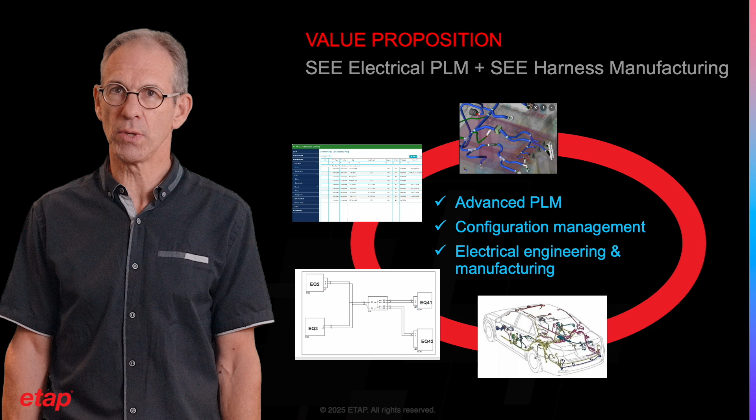A vehicle's reliability, safety, eco-efficiency, enhanced comfort, and more services have led to increased requirements for electrical cabling design, manufacturing, and traceability, as well as for the configuration and variant management. SEE Electrical PLM and harness manufacturing is a cutting-edge web-based software suite that is redefining what it means to be efficient in the management of electrical design data throughout the product lifecycle.

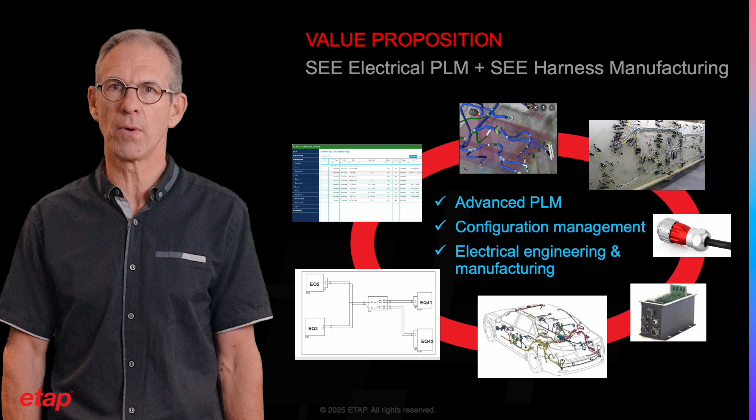By integrating advanced product lifecycle management functionalities and configuration management with robust electrical engineering and manufacturing tools, ETAP improves collaboration and ensures regulatory compliance. Based on 22 years of experience with top companies in their industries, our latest version 5 of our software suite, SEE Electrical PLM, is a culmination of the dedication to continuous innovation by our R&D team to introduce new features, enhance existing functionalities, and adapt solutions to the evolving needs of our diverse customer base.

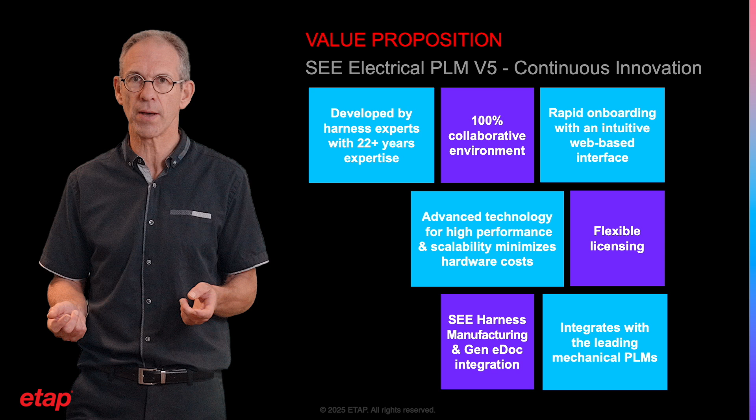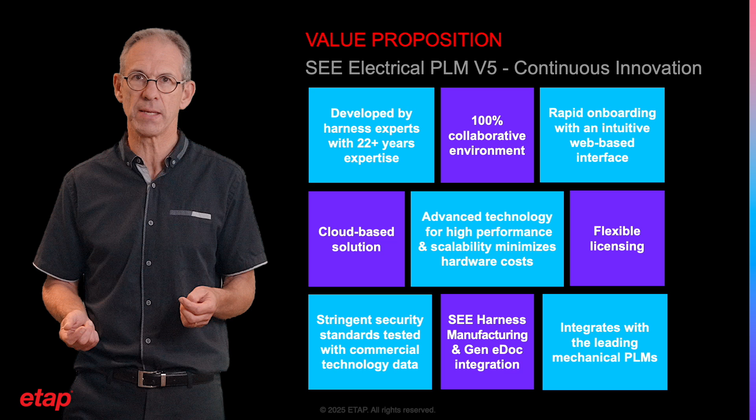The V5 integrates many lessons learned on how to simplify the collaborative design process and provide a more user-friendly interface. But there is more. It also benefits from the best performance, security standard, and scalability available by the latest cloud-based technology. Let us illustrate first together the challenges faced by electrical engineers when they tackle harness design complexity.

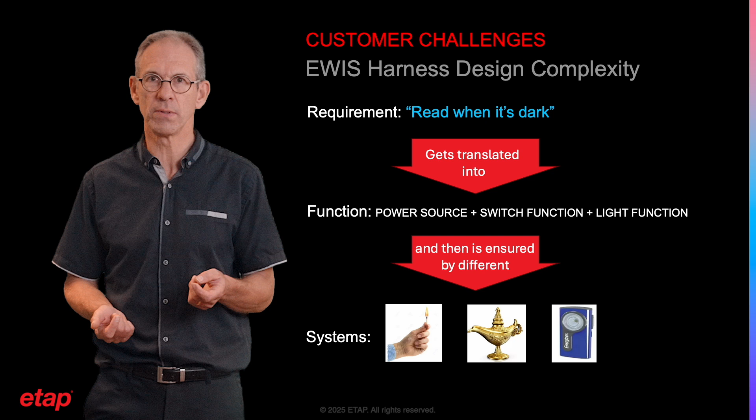Imagine, for instance, a high-level requirement received from a customer, such as read when it's dark, and how we transform this requirement into the final EWIS deliverable. The system engineers analyze the requirement and translate it into the relevant functions, which would be in this case power source plus switch function plus light function. To fulfill the light function, we may use different equipment devices like matches, a pocket lamp, or even Aladdin's lamp, the all-in-one option for very demanding customers.

We then have to define how they are linked to each other, which is done by many wiring diagrams representing the system logical definition. In addition, we need to know the electrical system installation constraints, defining in particular the location of the equipment devices. This is given by the geometry of the harness connecting our 3 equipment devices, which is loaded from a 3D CAD tool.

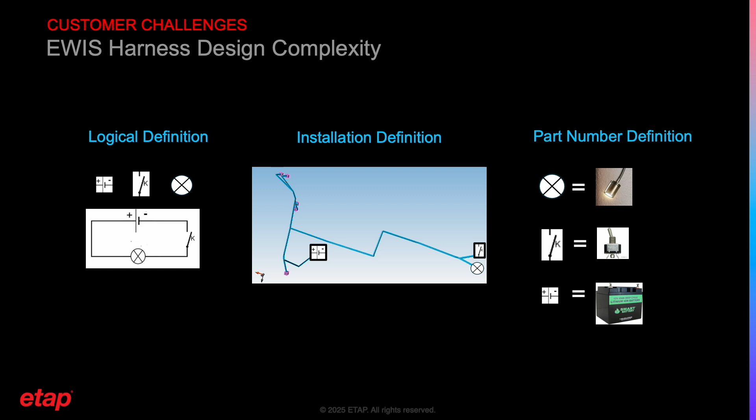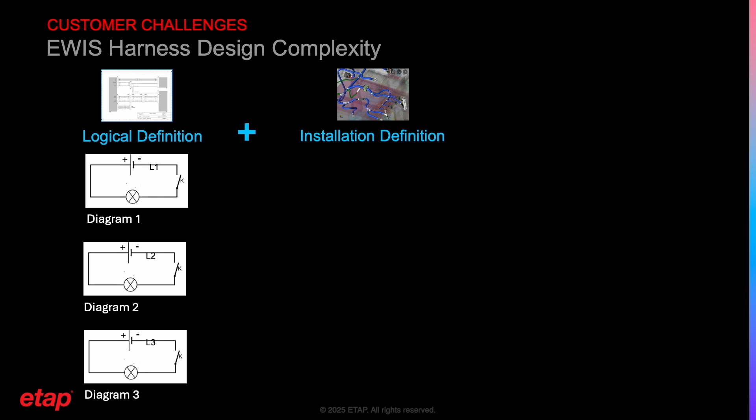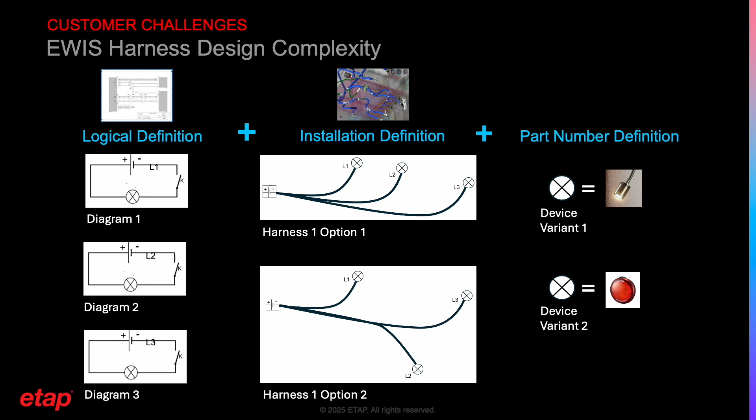As you imagine, there are many lamps and other equipment in a train or an aircraft, and that means a lot of diagrams. In the same way, a lot of equipment devices, such as the power generator, are shared by different functions. So, to deliver the product quickly and correctly in each product configuration, we have to manage in configuration the system logical definition, its installation, and its equipment devices, and combine them together for a given effectivity. And this makes a huge number of possible configurations that must be managed properly.

As it is critical to reduce the number of input data documents generated by the multiplication of the product options and variants, our software suite offers 2 dedicated web applications to manage them properly in configuration, ensure their consistency, and favor their reuse. The first one, SEE Project Manager, a product data management solution, is dedicated to the effectivity and lifecycle management of the 2 main input data: the wiring diagram, which provides the electrical system logical definition, and the harness geometry, which provides the electrical system installation.

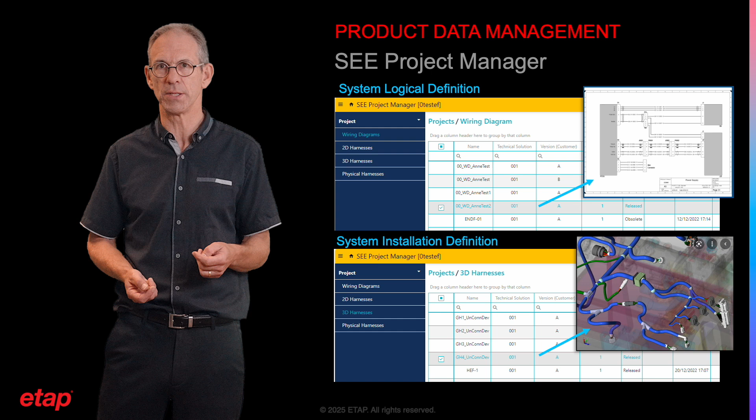Let us have a quick review on SEE Project Manager. So here we are going to manage in configuration the wiring diagram and the geometrical harness. So for instance, if I filter on the harnesses, I can select a given item here. Okay, so I can easily create a new solution of this selected item, or a new version or new internal version. I can also change the life cycle of my harness or change the validity.

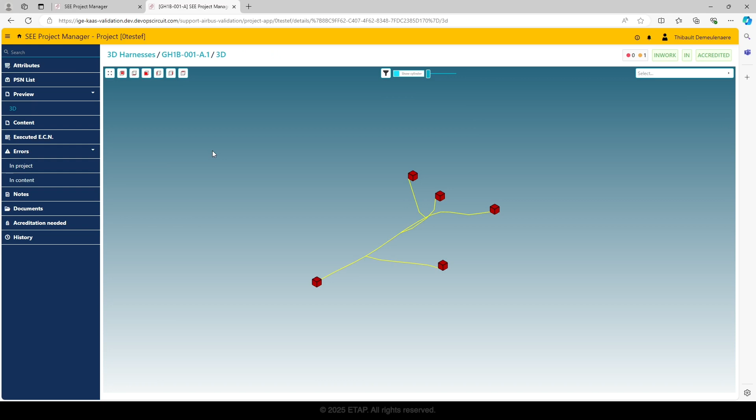If I want more information, by clicking on edit, I can access the quality check errors, for instance, here. Also get a preview of my harness like this. Get information about one connector.

In the same way, I can also create a new wiring diagram. So I will draw first in my schematics tool, and from SEE Electrical Expert, I will call SPM to upload my wiring diagram. So here, as you can see, you have the solution number, the version, the internal version, life cycle status, the system, the subsystem, and the validity here.

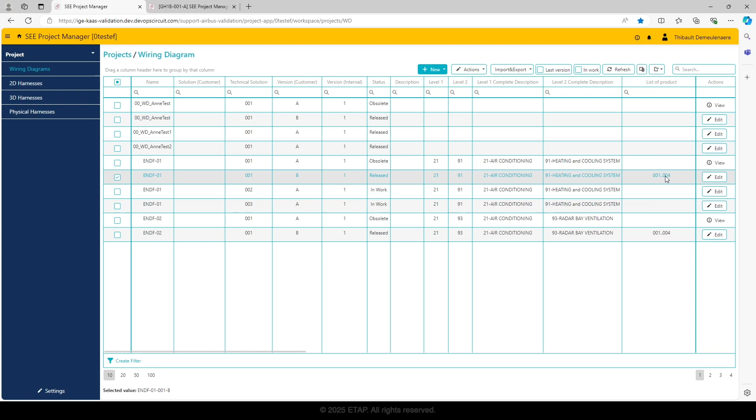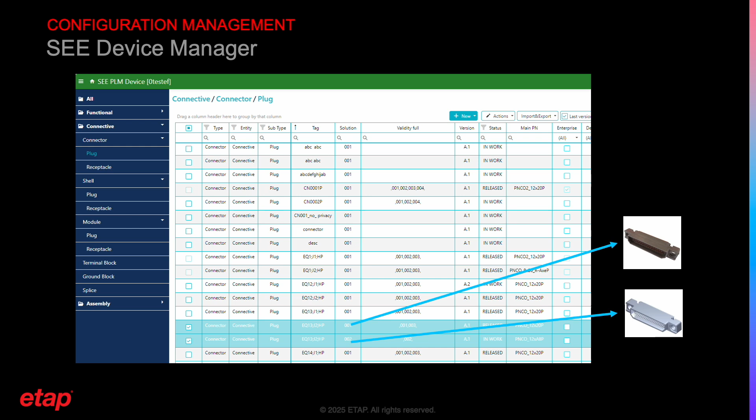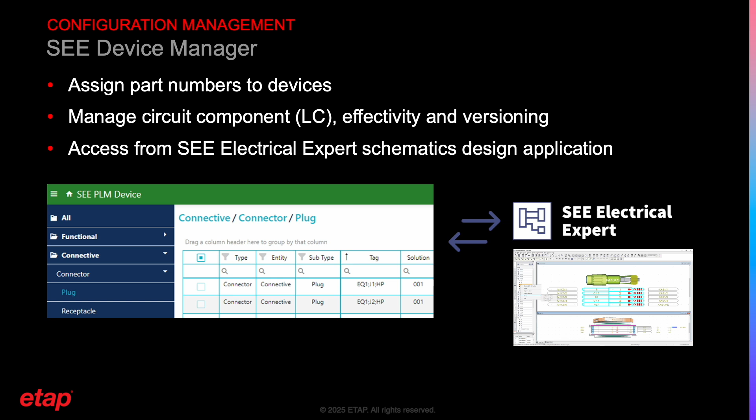In addition, the second web application, SEE Device Manager, allows the users to manage in configuration in the same way the last input data, the equipment devices and connectors. It allows you to assign the right part number to them and to manage also their life cycle, effectivity, and versioning. SEE Device Manager can be browsed from our schematic tool, SEE Electrical Expert, to retrieve the right device naming as well as its connectivity whenever defined via its part number. Because both web applications, SEE Project Manager and SEE Device Manager, are linked to each other, they allow collaborative design among teams from different domains.

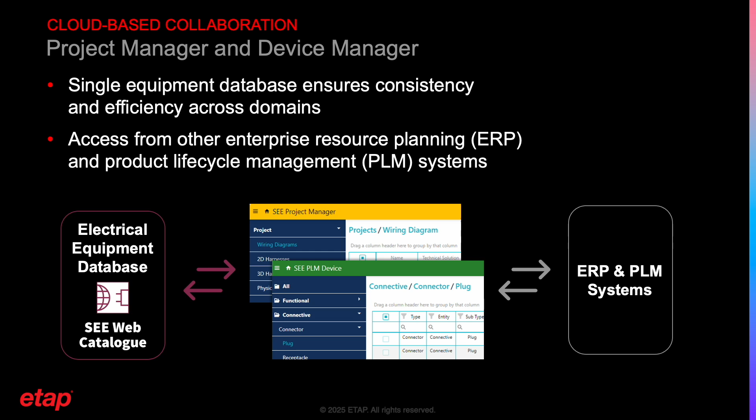Since the part numbers of the electrical components used in building the harness are used at all levels of the EWIS design and manufacturing processes, we manage them in a unique centralized repository, SEE Electrical Equipment Database. This database can be browsed from SEE Device Manager to select and assign a part number to a device, but also from our schematics tool, SEE Electrical Expert. It may also be seamlessly integrated into your ERP and PLM system. Let us see now what we can do with the SEE PLM device web application. So I launch it.

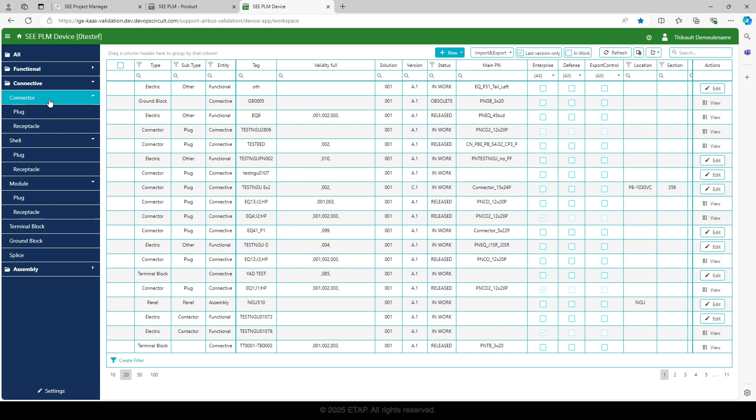This application is dedicated to the management and configuration of equipment devices and connectors we can find in a harness. On the left here, you have a breakdown of the equipment devices by category, subcategories. And in the same way, you can also navigate and find your connectors by category, subcategories.

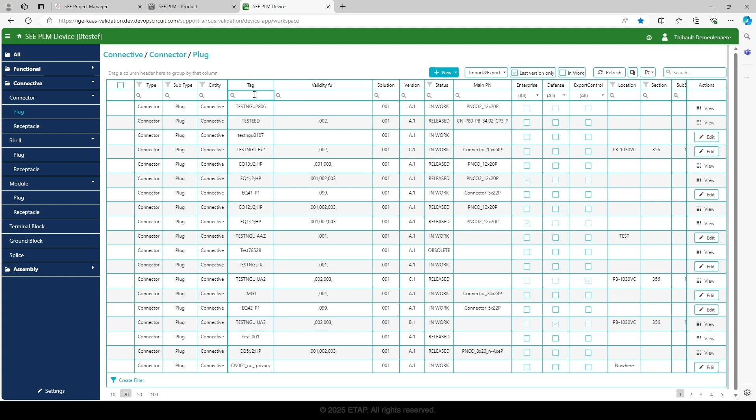If I select, for instance, plug here, I'll get all the plugs in my database. So you can see here the name of the connector, its validity, the solution number, the version, lifecycle status, the part number. So I can arrange all the columns that I want. If I want to find a specific connector, I can just type its name, for instance, this one.

So I can create a new variant. We name it a new solution here. Okay, so you select this new solution, and I want to assign it a new part number different from the one assigned to the solution 1. Click on Edit to access the property card. And here I click on part number and select part number.

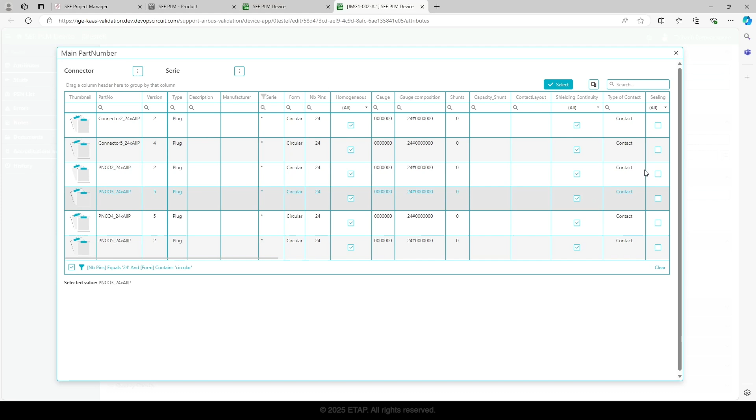And I'm going to browse the electrical equipment library. So I'm trying to find a 24 pins, which form is circular. So the system filters the right ones, and I will select this one and assign it to my solution.

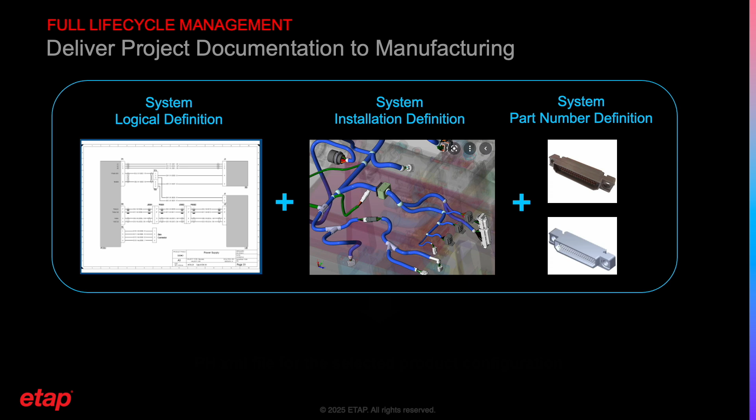From hundreds of wiring diagrams and harness geometry, thousands of connectors and wires part numbers, the challenge is now to offer the fastest process to combine all of them, identify and resolve consistency errors, and deliver a complete harness definition dossier to the manufacturing department.

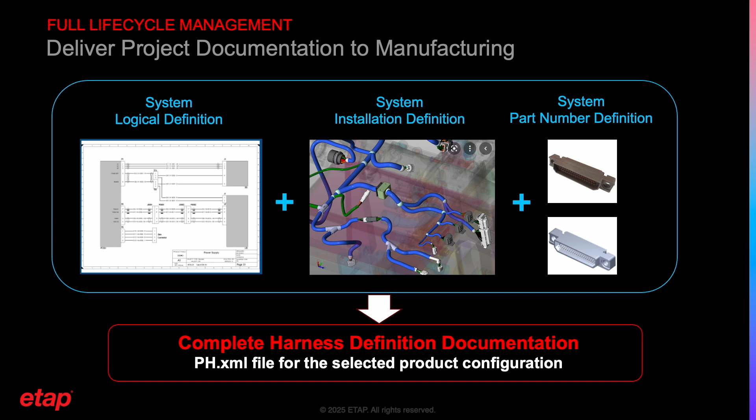Our web application SEE PLM Product is dedicated to the creation and lifecycle management of all the products to be designed. Product versioning makes it possible to compare the products at different maturity. Once a product is created, its harnesses can be calculated very quickly, thanks to the power of parallel computing allowed by our pool of web services. The harness calculation reconciles the logical and physical world.

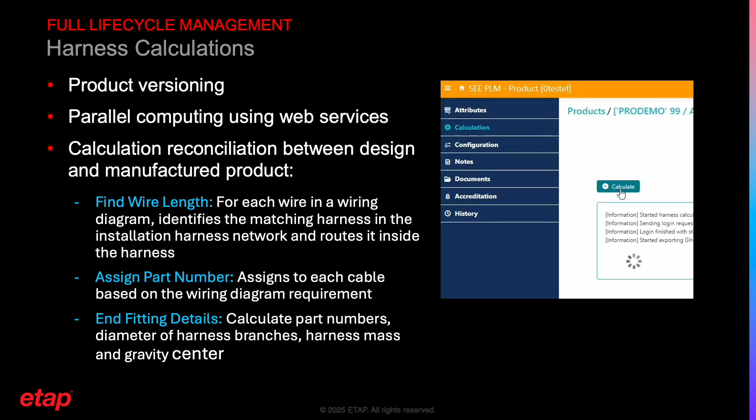For each wire in a wiring diagram, it finds the matching harness in the installation harness network and routes it inside the harness to deduce the wire length. It also assigns part numbers to each cable based on the wiring diagram requirement if provided. It calculates the end fittings part numbers, the diameter of harness branches, and the harness mass and gravity center. Let us see now what we can do with the SEE PLM Product web application.

So if I launch it, I get a list of all existing products, and I can easily create either a new product here, or starting from an existing one, I can create a new version of this product. The idea being actually to get different calculations depending on the design maturity and to keep the history of the different calculations. So here I select my version 3 of my product PRODEMO, and I'm going to launch the calculation of this version.

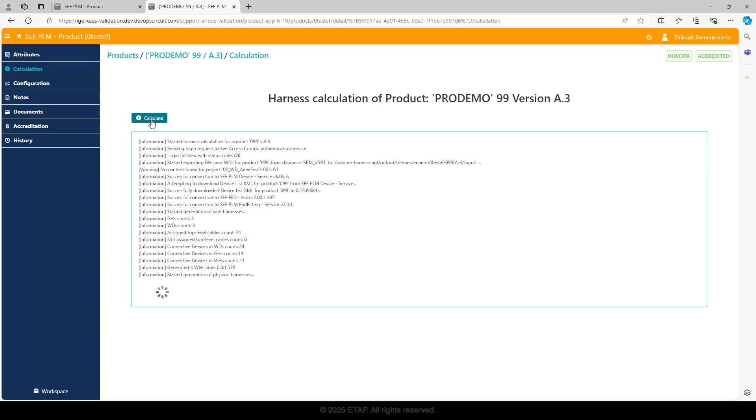So I launch the calculation, click calculate, and the system will retrieve the last up-to-date released wiring diagram, geometrical harness, and devices, and the system will combine all of them and calculate the corresponding physical harnesses. And you can see that's very fast. And now it's completed.

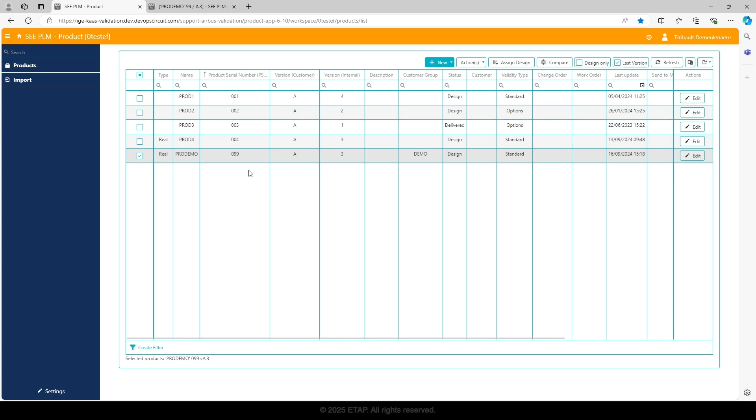We can also, using this SEE PLM Product, go back to the different product versions, and we can compare, for instance, base product here, this version, we can compare it with another one, this one, for instance. And the system will give us a delta between the different products in terms of harnesses and wiring diagram.

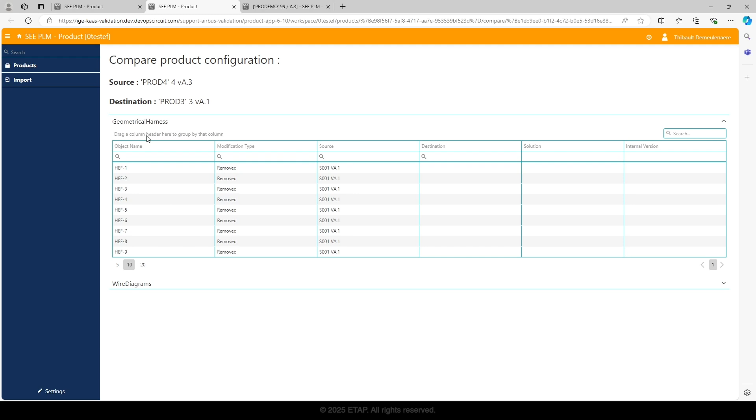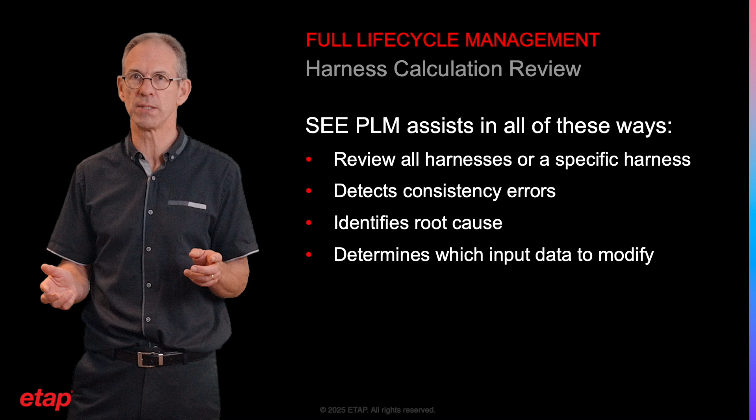To review the harness calculation result for all harnesses or for a specific harness, our dedicated web application SEE PLM Review offers unrivaled assistance to detect any consistency error, identify its root cause, and deduce what input data needs to be modified. When functional diagrams are also provided, SEE PLM Review will check their consistency against the wiring diagrams to make sure their equipotentials match the wire network.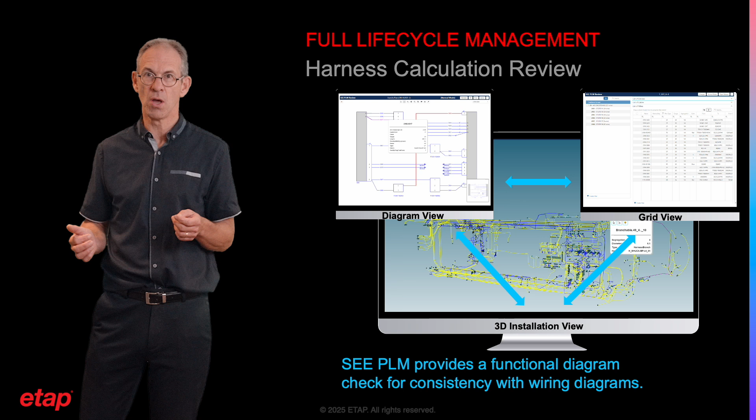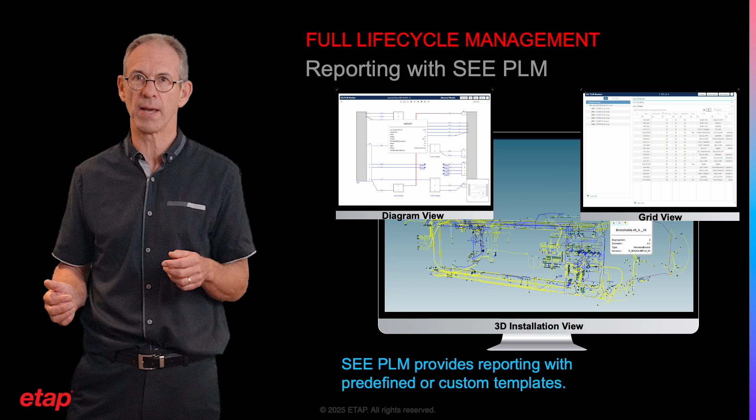With this SEE PLM Review application, it is also easy to analyze the delta for a given product between two of its versions, or for a given harness to compare it to the same harness in another product, or in another version, or to the prior version that was sent to manufacturing. With our latest web application, SEE PLM Report, we can take advantage of the large amount of data we have in our databases and easily deliver reports by using our default templates or by developing customized ones.

The results of my PSN 99. I want the last version of my calculation. I get the result organized by system and subsystem, but I have many entry points actually to review the results, either by device, or here I've got a list of all the devices of my product, with a number of errors, a number of warnings. So this is one entry point, but I can also go directly to my harness, for instance.

But also I can go directly to the list of errors. So here I've got an exhaustive view of all the errors, classified by harness with their criticity level here, with the message, detailed message, explaining what's wrong. In addition, I've got also the process responsible for the message here, the date of the check, and also which type of objects the message is attached to. Is it a connective device error? Is it a wire group error? Is it a harness error? And so on.

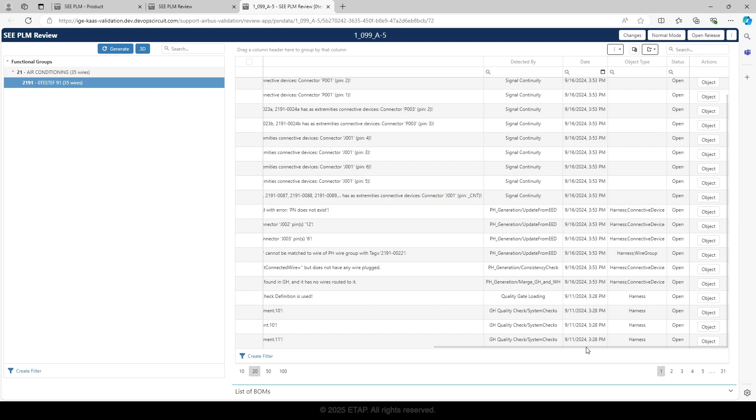So I can filter. If I want only the criticity level error, I can easily filter. I can organize my messages by harness or by object type. So if I go back to, for instance, my harness, imagine I'm more focused on the GH2A, I can get directly here the errors. Okay, organize them by criticity error. So here, definitely you've got some issue about the link to the part number database, but also about other routing issues here.

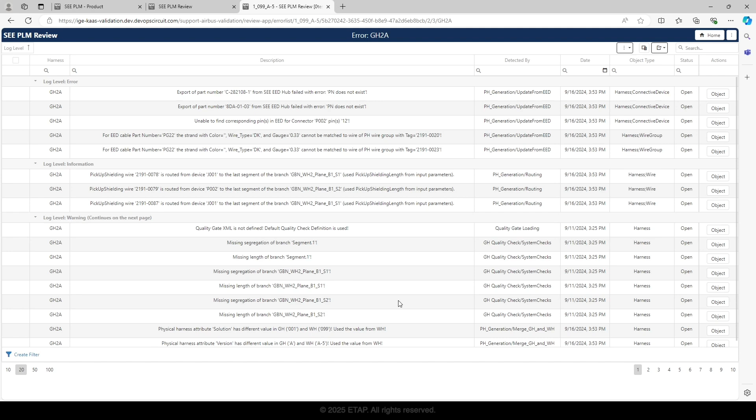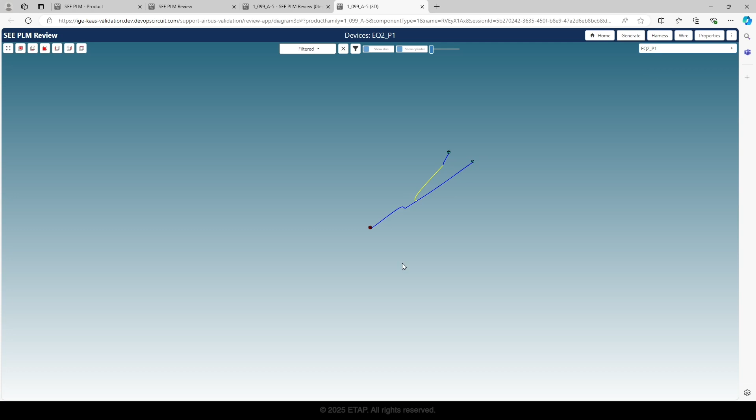I can also use as entry point the devices, for instance. Imagine I've got some doubt about my EQ2_P1. I know there are 2 errors, so I can get the list of errors here and warnings. But I can also locate, because I don't remember exactly what it is in 3D, locate my equipment. Okay, here I've got my equipment, my 3D, which belongs to harness GH1A.

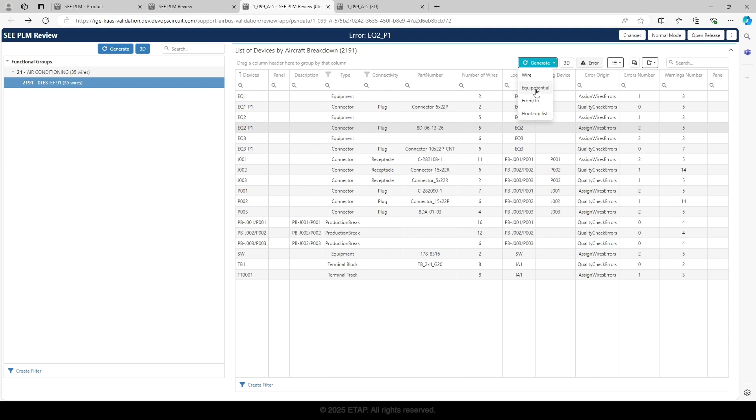I can try, for instance, to generate all the wires starting from my EQ2_P1 connector. So I can generate either the schematics of the wires or the schematics of the equipotential, for instance. Okay, so as you can see, it's quite easy to navigate from the 3D to the schematics and vice versa.

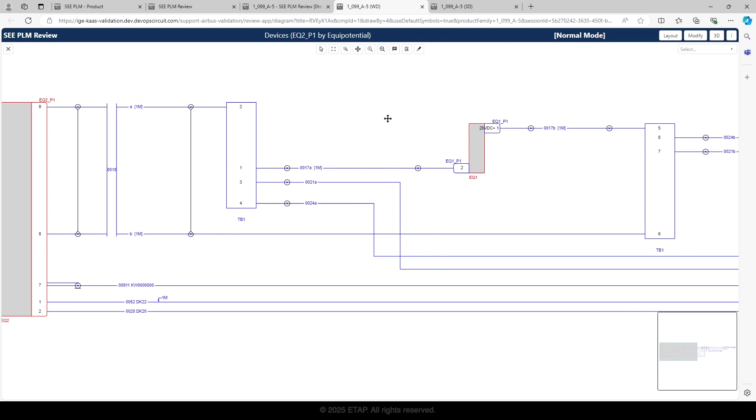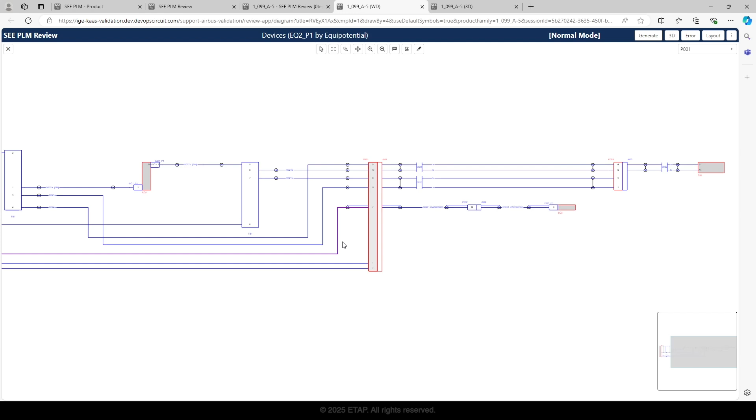Here, for instance, I've got all my wires starting from my connector, going to my terminal block, and I have here highlighted in red all the items which still have pending errors. So typically here I can select this one and also get the list of errors of this inline connector. So it was a quick overview of all the possibilities allowed by SEE PLM Review to help you find out what needs to be corrected.

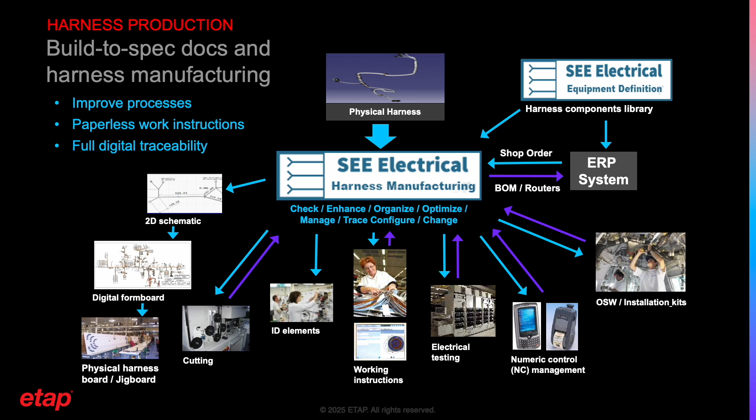Once a harness is released by the design office, you can generate its build-to-spec documentation and send it to our next software tool suite, SEE Harness Manufacturing. This software suite has been developed with Safran, a leader in harness manufacturing with more than 7 production sites around the world, and is now in production in many of them. Let us explore now the key points of this solution.

The harness received from engineering is loaded and completed by applying automatically the engineering change notes we name ECN, which are rule-based scripts that automate the harness enrichment for manufacturing reasons and ensure traceability of the modification that was applied. Engineering change notes can be created and managed in the SHM ECN Manager web application, either by using one of the default predefined ECN or by developing your own customized ECN.

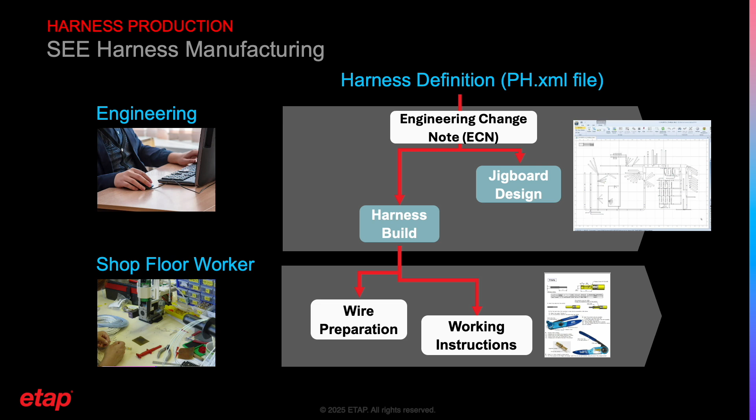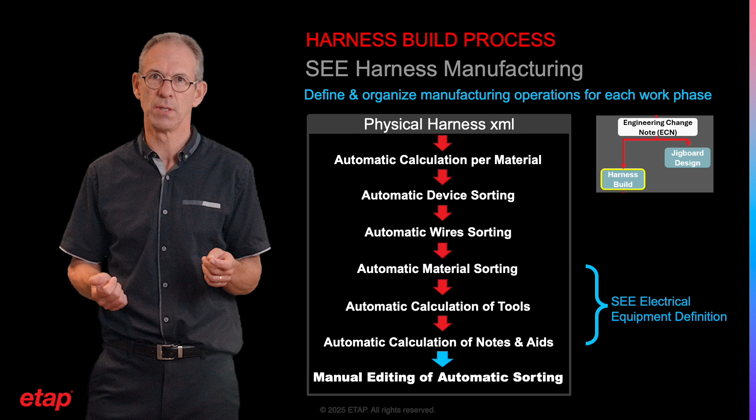Then the next operation to realize is the harness flattening on the jigboard table. With the SEE Harness Manufacturing build process model, you can then define and choose the best process to produce a harness. This could change from one production site to another one. During the industrialization, you can define the tools and methods you will use, the number of production phases and operations, and the sorting and the generation of the document data.

In practice, the method can be chosen from several industrialization methods, such as forming first and second hand, complete first hand, forming first and second hand, or complete first hand, incomplete first hand, forming first and second hand. You can examine these different scenarios to find the best process according to the production sites and the time pressure. Once it has been defined, the remaining process can be a fully automated delivery.

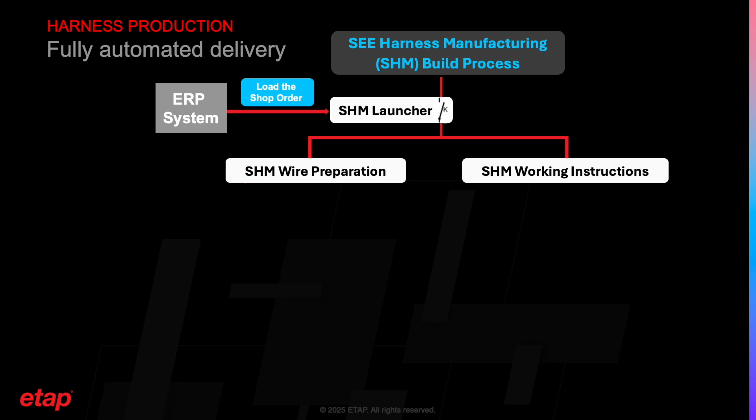A shop order from the ERP will be sent to the SHM launcher application, which will trigger the generation by 2 dedicated applications of the right data and documents for the harness in the given version. The first application fed by the launcher is the SHM wires prep application, used to create optimized batches for cutting machines and label printers. The second one is the SHM working instruction application, to generate and deliver to each workstation the expected paper or interactive instructions that describe to the operator the step-by-step process to assemble the harness.

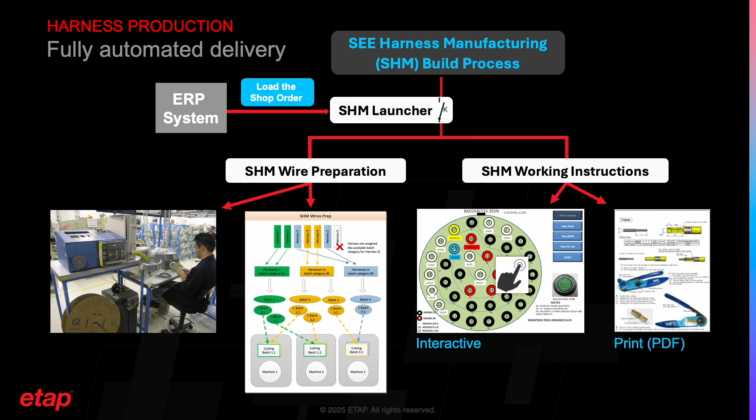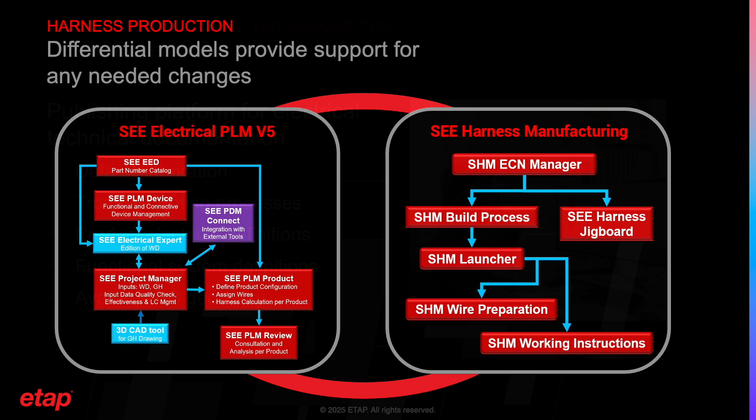Finally, the differential models will support you in any change needed during the harness production, pointing out the changes and what rework should be done. Later, our customers can benefit from our troubleshooting and documentation web application, SEE EDWIS. As you can see, by leveraging automation, customization, and integration with the latest cloud-based technology, SEE Electrical PLM empowers your electrical engineers with powerful tools that transform the way EWIS is designed, while SEE Harness Manufacturing brings process improvements, paperless work instructions, and a full digital traceability.

Thank you for attending our SEE Electrical PLM and SEE Harness Manufacturing presentation. We showed you how to ensure accurate, compliant, and collaborative design and manufacturing of your harnesses while increasing your productivity.